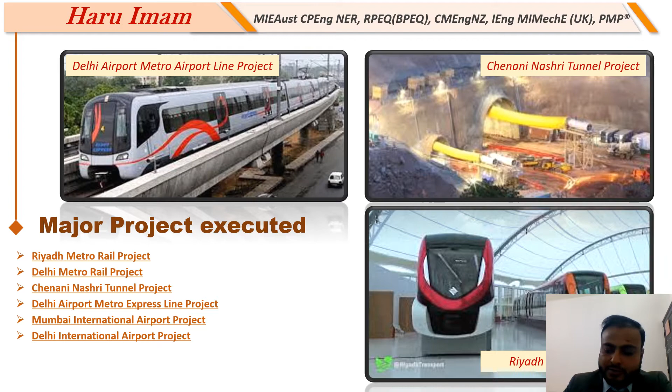My research topic is construction robots and advanced digital technology utilization to improve the productivity of tunnel boring in infrastructure projects. Construction is one of the largest and most important industries in most developed countries around the world, yet the use of robots and advanced digital technologies for better productivity on the job site is very limited.

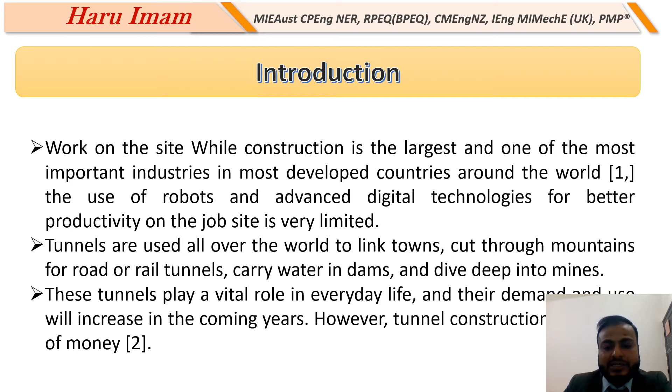Tunnels are used all over the world to link towns, cut through mountains for roads or rail tunnels, carry water in dams, and dive deep into mines. These tunnels play a vital role in everyday life and their demand and use will increase in the coming years. However, tunnel construction faces many challenges.

The ratio of the index of output to the related index of aggregate input is known as productivity. Although there is no specific description for efficiency, several terms are used to describe it, such as success factors, production rate, and output per man-days of work.

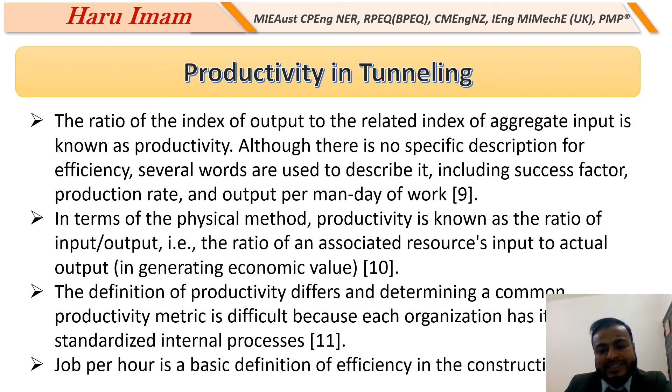In terms of physical method, productivity is defined as the ratio of input and output, that is, the ratio of associated resource input to actual output in generating economic value. The definition of productivity differs, and determining a common productivity metric is difficult because each organization has different standards and internal processes. Output per hour is a basic definition of efficiency in the construction industry.

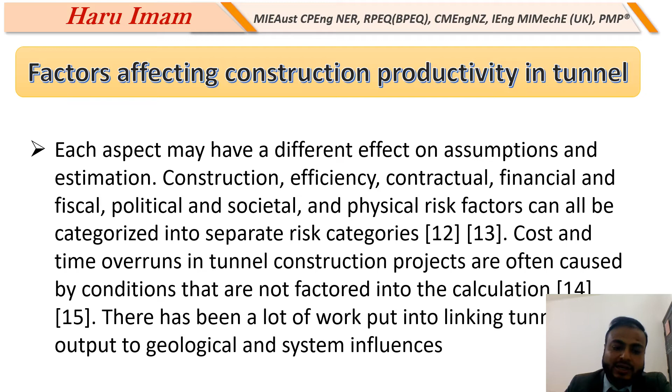The factors affecting construction productivity in tunnels each may have a different effect on assumptions and estimations. Construction efficiency, contractual, financial, fiscal, political, and physical risk factors can also be categorized into separate risk categories. Cost and time overruns in tunnel construction projects are often caused by conditions that are not factored into the calculation. There has been a lot of work done on linking tunnel output to geological and system influences.

There are many conditions which cause delays, such as management conditions. All site operations must be coordinated by distributing proper personnel at the proper time, in the proper venue, and with proper efficiency for the construction work to flow smoothly.

In today's mining project, on-time or early project execution is more critical than ever, because time delays cost the contractor more money by reducing profit margin.

Not only this, but also by using TBMs, one of the latest technologies after NATM, the builder is able to reach a quicker average construction time. However, the time it takes to procure a TBM can be very long, around 12 to 14 months, causing a delay in start. It is better to pre-plan the procurement of TBMs for a mining project rather than waiting for the entire delivery duration of the contract.

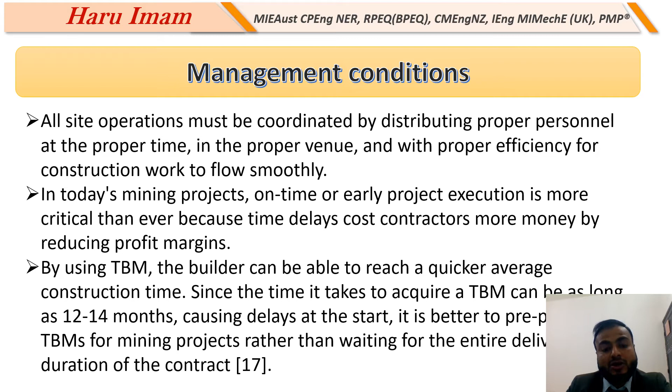There are also environmental conditions which can cause delays, such as heavily weathered conditions. Areas where tunneling is performed often pose special difficulties in forecasting its actions. Due to lack of technology in the field of geotechnical imaging, the geology between tunnel portals is one of the most significant factors shaping tunneling cost.

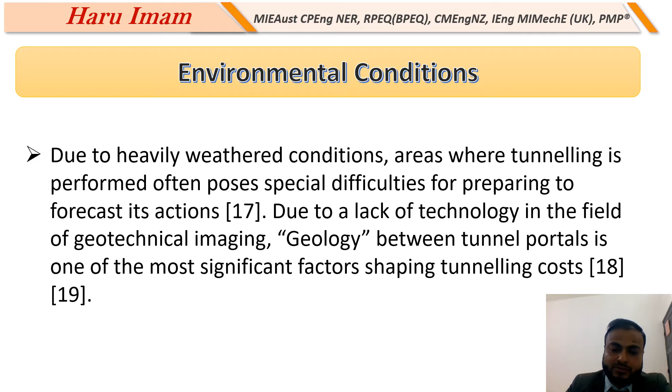There are also physical conditions that can contribute to delay, such as TBM range being determined by the scale of the construction site and its usability. To lift the TBM into and out of the launching and retrieval shafts, heavy cranes need extra space on site, which directly affects the size of the individual TBM pieces that can be transported to various places.

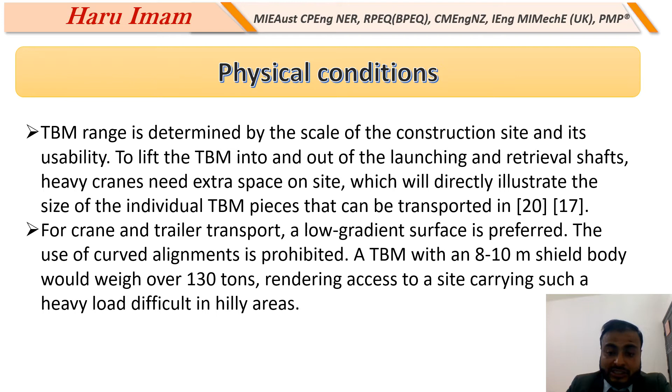For crane and trailer transport, a low gradient surface is preferred, and the use of curved alignment is prohibited. A TBM with an 8 to 10 meter shield body would weigh over around 130 tons, making access to site and carrying such heavy loads difficult in hilly areas. There are various other physical conditions which can contribute, like movement in hilly areas, procurement, and the shifting of the TBM and other parts.

There are also breakdowns of TBMs or other equipment that can cause delays. Delay can cause up to around 73% of the excavation per week to be inefficient. In more than half of the scenarios, TBM use is exacerbated by delays and maintenance.

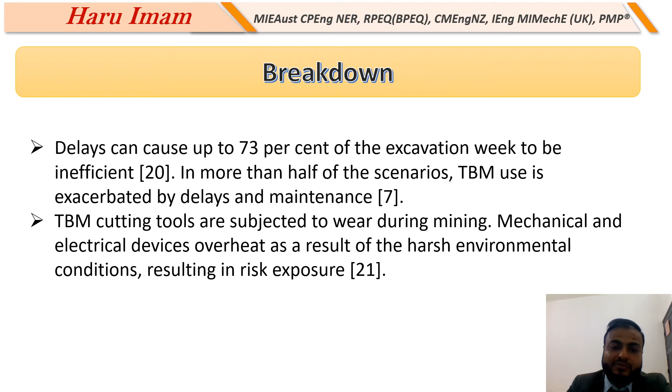TBM cutting tools are subject to wear during mining. Mechanical and electrical devices overheat due to harsh environment conditions, resulting in risk exposure. There are various other things that can go wrong with the dumpers that take the TBM muck out, and the conveyor belts also.

TBM cutting tools and machine wear and tear are the major factors. There are other delays, such as delay times caused by breakdown of time reserved for mining limit, TBM improvement, and productivity. Construction delays are one of the most common issues that impact cost, timeliness, efficiency, and safety.

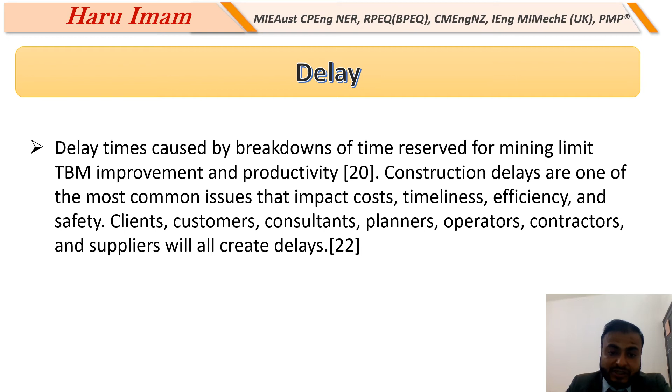Client, customer, consultants, planner, operator, contractor, and supplier will create delays. They may also create delay due to communication gaps, wrong planning, or due to productivity calculations not being taken properly. There may also be various delays due to the interfaces of many activities.

Now I will explain the research methodology I have taken. The strategy adopted to gather practical information from the undertaking site was systemized input from questionnaires.

The questionnaires were dispersed to construction and infrastructure development experts in various regions. The survey was organized to give insights on the individual demographic factors causing delays, and suggestions for mitigating delays through the utilization of construction robots and advanced digital technologies. The collected data was evaluated through a statistical technique known as the relative importance index, used to analyze the data to get the desired result.

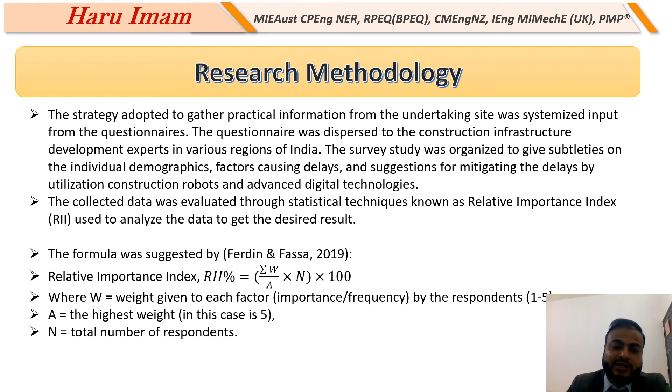So the ranking of the delay factors has been analyzed through this questionnaire and the RII index. The major factor that came out was physical conditions and management conditions, where the secondary condition was breakdown and TBM parameters in tunnel construction, and the tertiary was environmental conditions.

Physical conditions are around 77%, whereas management conditions are around 75%, followed by breakdown and TBM parameters in tunnel construction at 67%, and finally environmental conditions, which may arise or fluctuate, at around 66%.

To mitigate this delay, we have proposed two things: construction robots, which can be used in the future of infrastructure, and digital technologies, such as various advanced software and techniques used in digital technology like Primavera, Tilos, and others, which help. Plus, there are many jumbos and automatic jumbos used as construction robots.

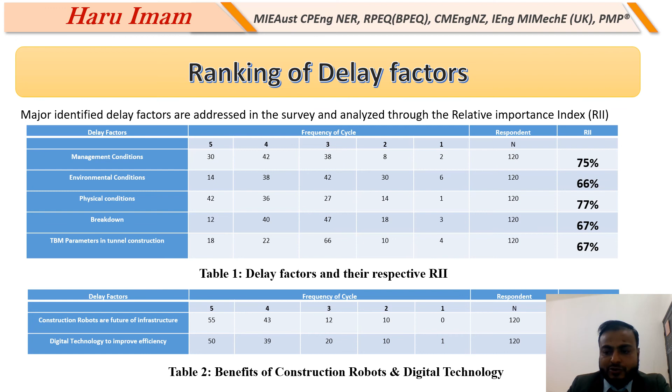In discussion and conclusion, this study has discussed the significant factors responsible for causing delays in tunnel construction or infrastructure projects. The major factors of delay, as discussed in the previous slides, were management decisions and site conditions.

This is followed by breakdown and TBM parameters, and further followed by environmental conditions. The mitigation can be done by using construction robots and digital technology, which support future infrastructure projects to increase efficiency and reduce cost.

In conclusion, I can say that the future is about using advanced digital technology, innovative techniques, and construction robots, which will definitely help in the future to carry out various kinds of construction in tunneling. Thank you very much.